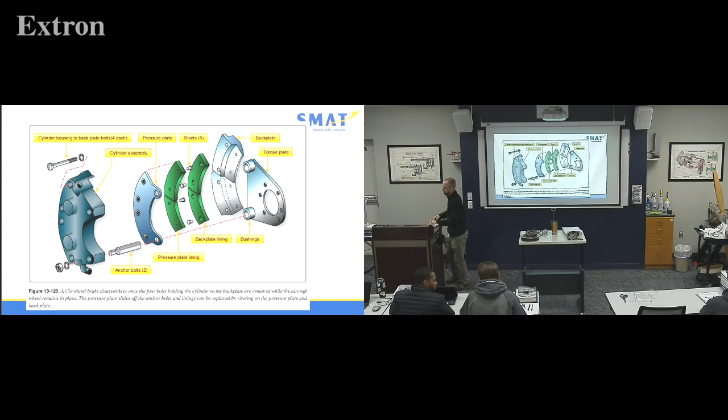All right. Oh, I did want to do a quick overview on this. So this is if you're buying tires from Goodyear. Yeah, go ahead, Corey.

Some of the aircraft, they're on the top. A lot of aircraft, they're on the bottom.

And if you force it hard enough, eventually everything will come out. But we have options to bleed it different ways. Because in a car, you're normally going to just fill up the well, it's a boosted brake system. You're just going to fill up the reservoir at the front. And you're going to push the brakes, somebody's going to open the bleeder, right? And so in our system, you can do that, top down, but normally we'll do a bottom up as well. So it's really nice to do it.

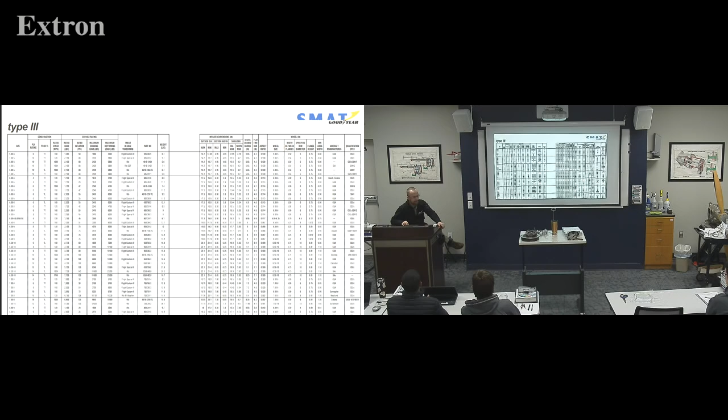From the bottom. Yeah. All right, so if you're looking for a typical, you've got to buy a tire for your aircraft, okay? Let's just do the simple ones, okay? The top category, 5-5. How many of you had a 5-5 tire? Dan, raise your hand. Okay, good. And Gavin, good. Mr. Finney, anyone else? All right, so 5-5 is typical Cessna nose tire, okay?

Typical, unless you get to a 206 or something big, right? So small Cessnas, but notice the ply ratings. What is a ply rating insinuating? The strength of it, okay? So we have 6 ply or 10 ply. But then you get over to the rated load in pounds. Rated load in pounds goes from 1,200 to 2,100. It's a big difference.

So you can't just grab a 5-5 tire and say, let's just send it. Because if the aircraft's 1,400 or 1,500 pounds, you've got to already anticipate that at some point the pilot's going to drive it home. We got a 1,500-pound aircraft hitting a nose tire on landing, and you've only got a 1,200-pound load rating tire on there. They're gonna drive that oleo strut right into the ground, okay? Everybody kind of get where I'm at? So please make sure you're matching the tire to the rated, or what is rated for that aircraft, okay? Goodyear's super good about selling you the right tire.

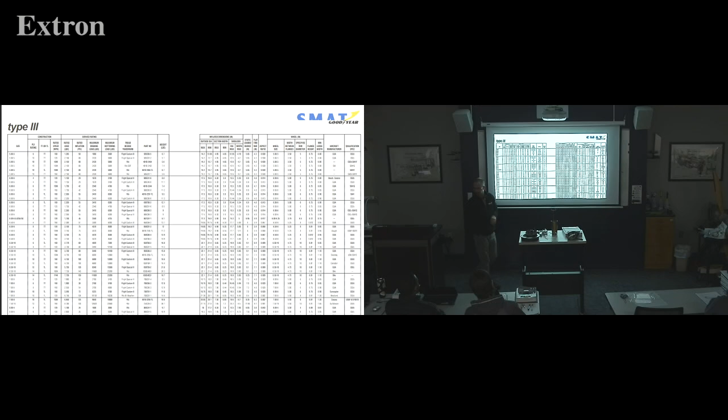Hey, I have this aircraft, notice here, braking pressure 3,400 on some of the 6.6s, okay? Where would I want a 3,400 pound? Probably on something like the Apache, make sure I can stop that load. Versus the Bonanza wouldn't need a 3,400 load, you could get away with probably a 2,500 pound load. See what I'm saying here? We good? So please know what aircraft you're working with. Make sure you get the right loaded tire.

Okay, brake systems. Brake systems. How do brakes, yes sir? For those load rates, is it a harder compound with a higher load, or do you guys use a higher load rating later? Sometimes, yes sir. Yep, because it would be a little heavier or harder.

Yeah, and even think about it. If your wheel is a soft aluminum, use a harder ply rating. The tire may not give if they made a really hard landing. Maybe the wheel would crack instead.

Okay, so how do brakes operate in your car? How do brakes operate in your car? Yeah, on the pedal, pushing on the master cylinder. Push on the pedal and it pushes on a thingy called the master cylinder. Is that what it is? Is that really what it is? The master cylinder? Master cylinder.

It's not a brake boosted or booster brake system? Well, it is, but it's boosted, but no, it's still direct connected to the master. Yeah, so it's sending fluid, but then you get a kick in the pants when the car's running, right? And it helps to add more pressure to the brakes, okay?

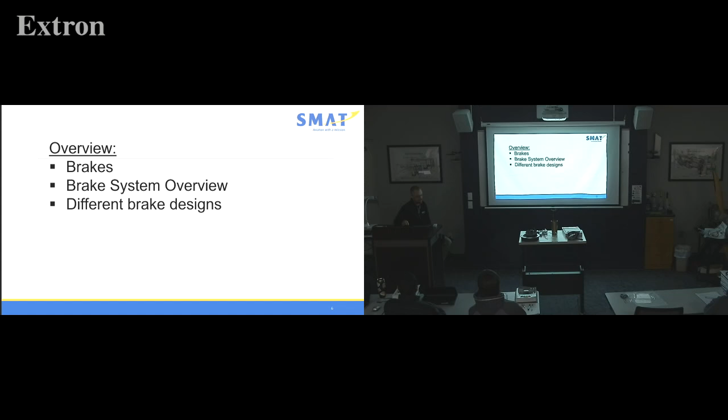Well, in aviation, we have all types of different brake systems, okay? All types. So we're going to hit just a few, the basic ones, and then we'll get more complex. Not today, but just basics today. Brake system overview and different brake design. So we should understand the brake system and understand the operation of the caliper versus the disc.

Okay, problem with brake system, here we go. Somebody turn this all the way down, dude. What in the world?

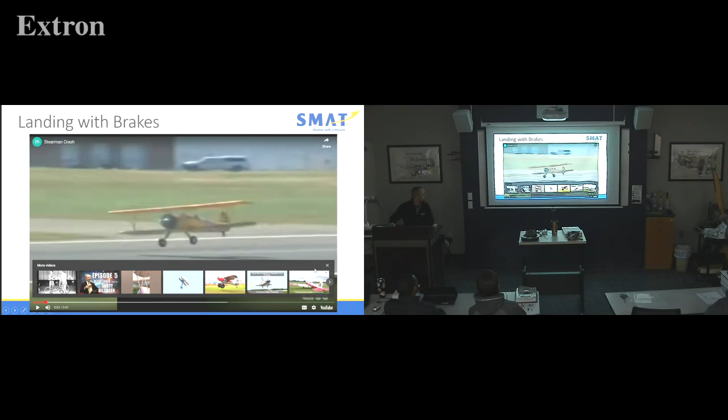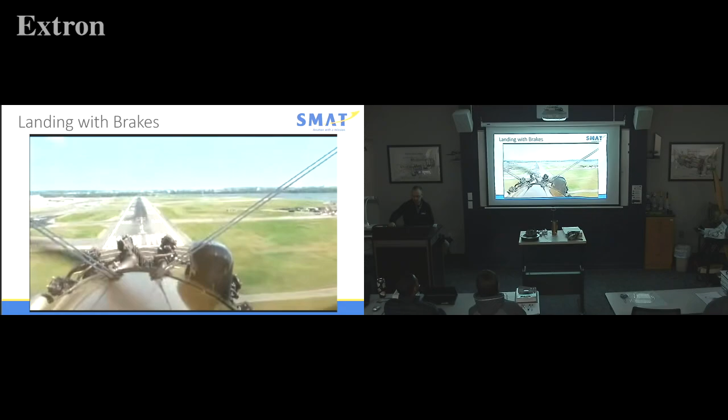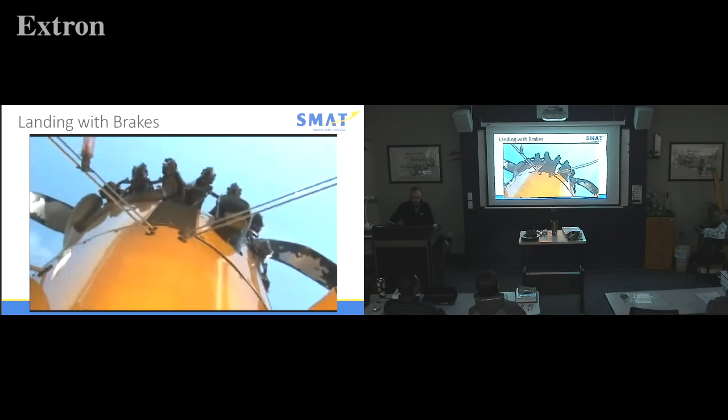And as we came in for a landing, the plane that I was in flipped over. You okay? Yep, unhook your belt. As you would imagine, it happened very quickly. And suddenly we were upside down lying on the runway, and...

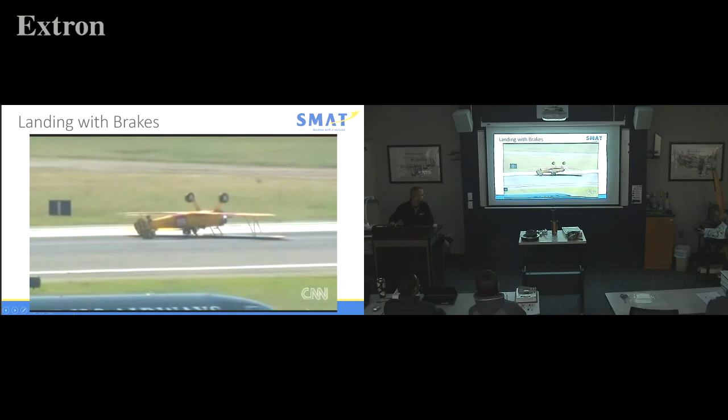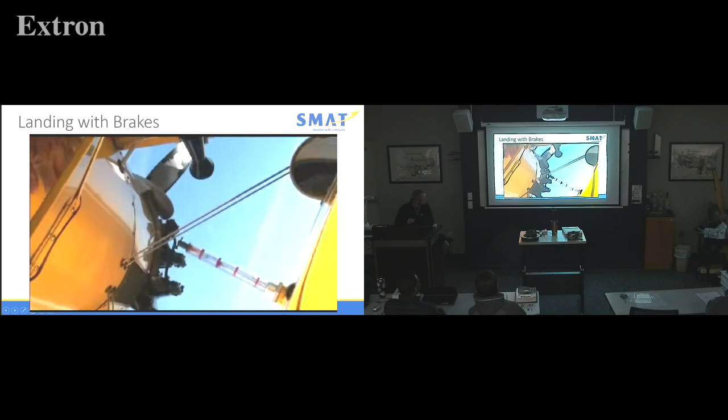And as we came in for a landing, the plane that I was in flipped over. You okay? Yep, unhook your belt. As you would imagine, it happened very quickly. And suddenly we were upside down lying on the runway, and the pilot and I made sure that...

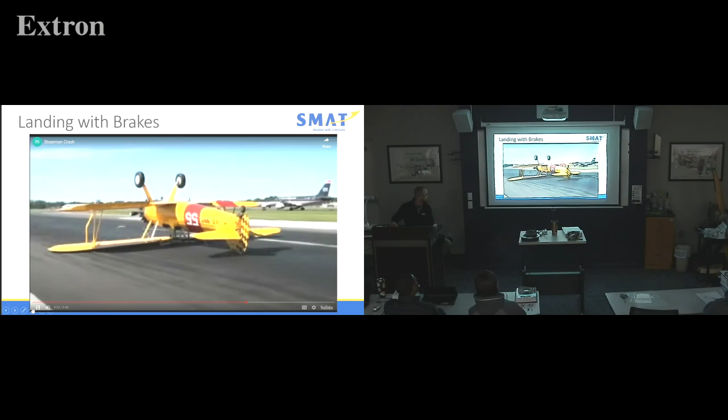Sometimes brakes lock up. Very sad.

Okay, so how do brakes actually operate? You're going to push the brake pedal. Typically it is where on your aircraft? Top of the rudder pedals. Yes, sir. So it would only flip over like that if it was a tail wheel aircraft, right? Because if it was trike style, the brakes would be in the back. Yeah, but depending on how they brake, there's been an occurrence where they can actually tip this way if they really get on the brakes. They can tip sideways, and then the plane sits on a wing and prop into the ground. It happens.

Okay, so you're gonna push on the brake pedal. Old style brakes were heel brakes. Have you ever flown a heel brake aircraft? Taylorcraft, yeah, old Piper Cub. That's when I got my aerobatics rating, was in a Super Cub, and it was all heel brakes. It was super tricky transitioning from toe brakes to heel brakes, because it's like, oh no, I want to push the rudder. No, that's the brakes. It got a little tricky sometimes.

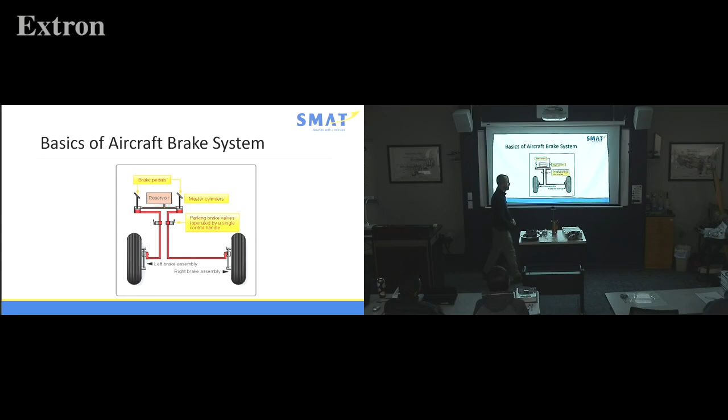And they make Goodyear brakes. That caliper's on the inside, ain't it? Okay, I guess you're, no wait, it's not on the axle. Axle would be right here, bam. And let's not talk about Goodyear brakes here.

So, dual master cylinder system. Pilot's got some brakes. Oh, and guess who else? Co-pilot gets brakes too. Instructors really like this style. First aircraft I flew, I was 15 years old, and only the pilot side had brakes, and he's like, man, you know what you're doing? He was super nervous, but you know what, I'm here today, so I guess the brakes worked.

So, as the pilot pushes on brakes, notice the difference in the brake master cylinders. What do you notice? Any difference there? One has a reservoir, or one's a little chubby up here. Okay, so we've got one like this, bam, and you got one like this, bam. Okay, make sense?

That's all it gets, that's all the fluid, that's all the reservoir. Why do we need such a small reservoir? It's not supposed to run a lot. No, you don't really need brakes until you land, right?

We don't use tires very often, right? We don't use brakes. So the pilot pushes, and it comes in the inlet, and out the outlet down here. I can't think of an aircraft that would run this system. Piper runs it opposite, where they have a reservoir up here that runs to the co-pilot, then over to the pilot. The pilot has direct down to the brakes. That's a better system, because now as the pilot pushes, it's got to push it through the co-pilot's side and then down to the brakes. See that problem there? So if I have any air in the system, it's going to show up.

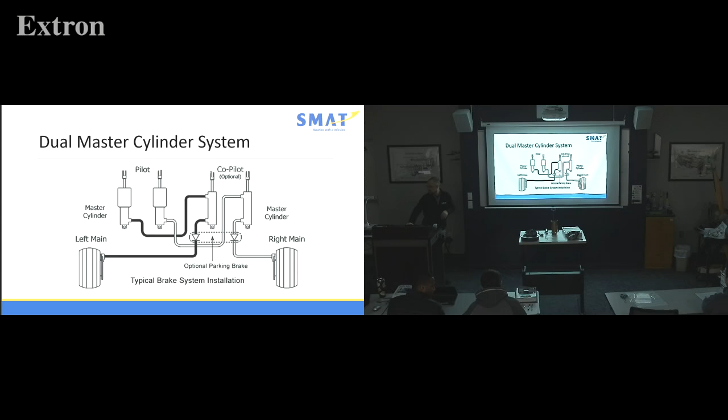So in this system, we have a reservoir. The reservoir is filling the master cylinder. As the co-pilot pushes, where does it go? Over to the pilot side, and then out the pilot side down to a parking brake, or actually directly to the caliper on a Piper system. So that way the pilot has direct control. That's actually a better system, the way the pilot has direct braking.

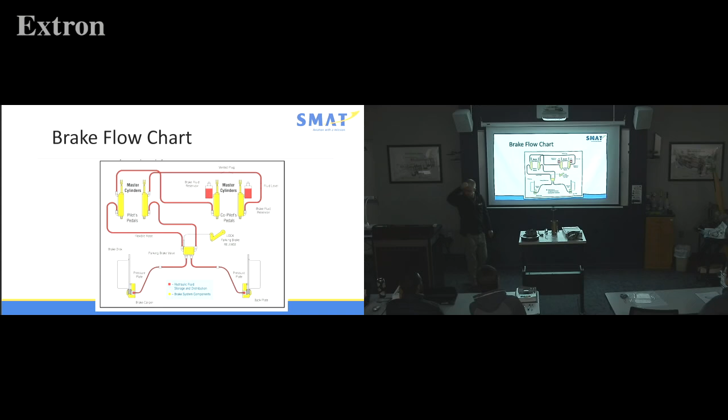One of the functions of the brake system is to absorb heat energy developed during braking. The majority of this heat is absorbed by the brake disc. Get this - some tires actually have weep holes that, as they get too hot, will have a fusible plug that will actually release that heat.

Why is that? Not seize - well, maybe it'll seize, that would be on the brake side. But it's rubber, and as they heat up that tire, there's a great chance of flammability. Oh no, the tire's super hot. Now they'll release a fusible plug so that the tire does not catch on fire, and that plug will go out and release it so that the heat energy doesn't cause the tire to catch on fire.

The large mass of the disc - so the majority of the heat is absorbed by the brake disc as it's spinning. The larger the mass of the disc, the more heat energy it's able to absorb. A well-designed brake system will provide adequate disc mass without excessive weight. So we have very thin discs, even on larger aircraft, for example the Beechjet. The discs themselves are very thin, but there are multiple ones so that it can dissipate that heat. Yes sir?

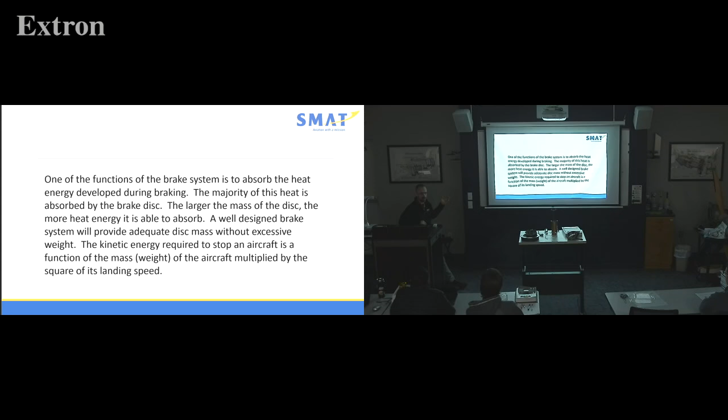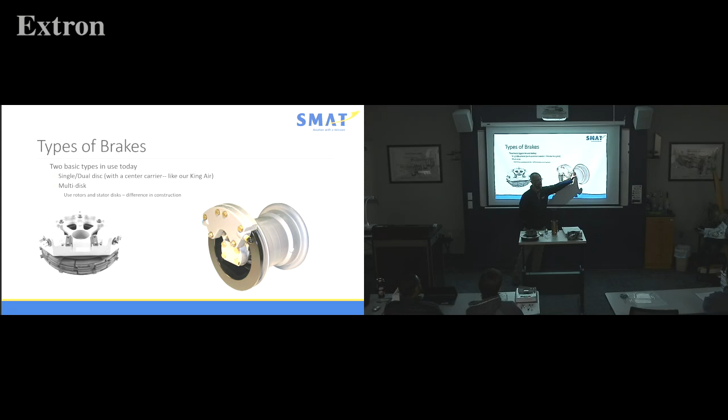Over here we have a single disc attached to the wheel, and the floating caliper. Is this single or dual? Dual piston. We have dual pistons here, and it's squeezing. It has a lining on this side and a lining on that side, squeezing that disc.

One of our favorites here is an expander tube. Anybody ever worked on one of these? On a four-wheeler. So these are mostly pure asbestos, okay? Discs here are linings, and inside is a tube. As they pushed on the brake, it would push out on that rubber tube like a balloon.

It would push on the wheel inside to stop it or slow it down. Expander tube - kind of like drum brakes, in a sense? No, this is a drum brake, a little cute drum brake. As you push on a drum brake, it pushes on a little cylinder, and then these come out and slow it down. Versus expander tube, the whole tube is filling, the whole giant tube is filling, literally like a rubber balloon.

DC3s use this. This is off an old mail plane. When I pass it around, it says Jackson, Michigan, which is where the mail route was until they almost bankrupted. Then he flew it out of the hangar in Jackson, Michigan, and immediately had enough business for the next 30 years.

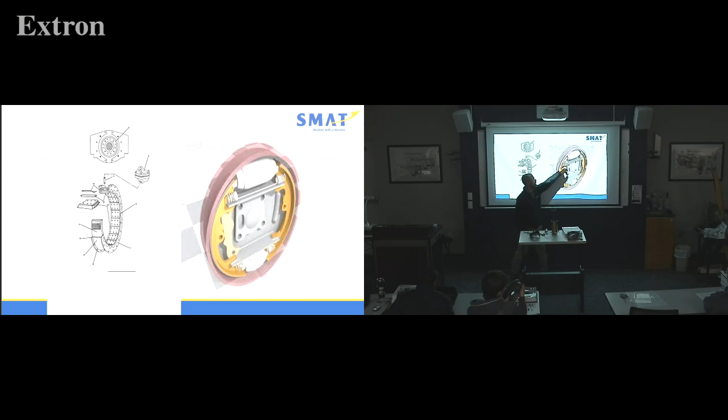Drum brake off a Chevrolet truck or old Ford truck, where it pushes on both sides and it slows it down. This is one off an actual aircraft here. So as you push on it, what does it do?

It gets hung up? No. Go ahead - drum brakes do exist on airplanes? They do, yep. This is an actual one, and notice there's no adjustment like there is on a Chevrolet, okay? You just keep pushing harder if it doesn't stop, right?

Now, you have direct linkage. Taylorcraft doesn't use hydraulic fluid, but they use drum brakes with a cable. So they have a cable connected here, and that cable is adjusted over time. You gotta keep tensioning that cable up as the brake disc wears, okay?

So this is a drum brake, and that would be an expander tube style. Any questions on these two types? DC3 still uses the expander tube type. I have one, and it's about 40 pounds - pretty wild looking. That's inside the wheel itself.

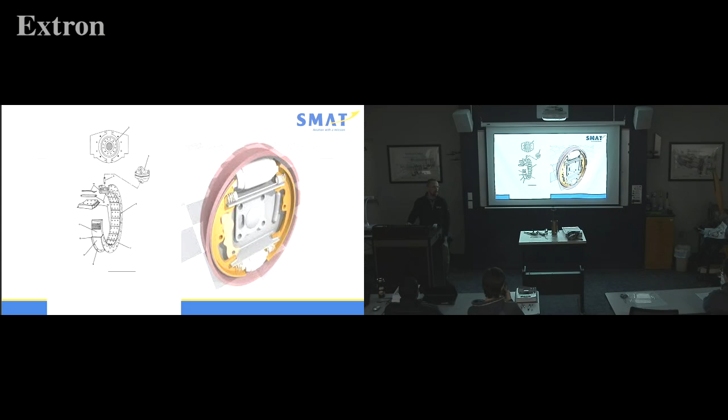All right, let's move on to Brian's favorite. Everybody ready? Drum roll, please.

Oh, yay! Okay, so we have the historic one here called the Goodyear brake system, which there are still some out today. They have not been made since sometime in the 70s - sometime in the 70s they quit making Goodyear.

So the way this works is you have a floating disc. The disc is made to float. This looks like a gear - it's really not, it's actually the point of floating for this Goodyear brake disc. And what is stationary is the actual caliper, and the caliper is then directly bolted to the axle.

So as the wheel spins, then you push on the pedal, and it pushes out this little tiny cute baby asbestos brake lining. I'll pass it around, it's still in there, you'll look at it. And that's what stops it, okay?

Why did they stop these? Anybody have an idea of why they stopped making these?

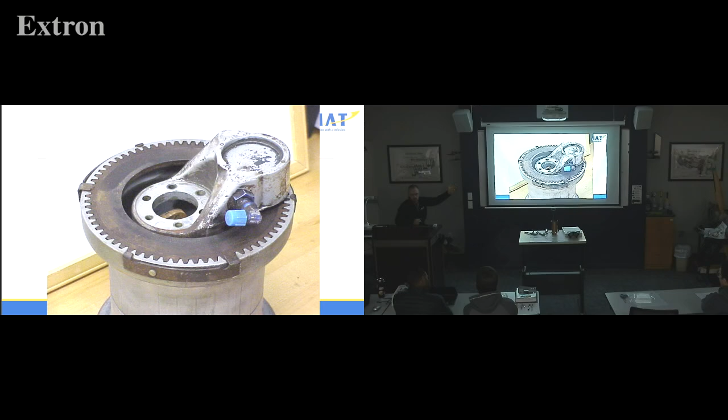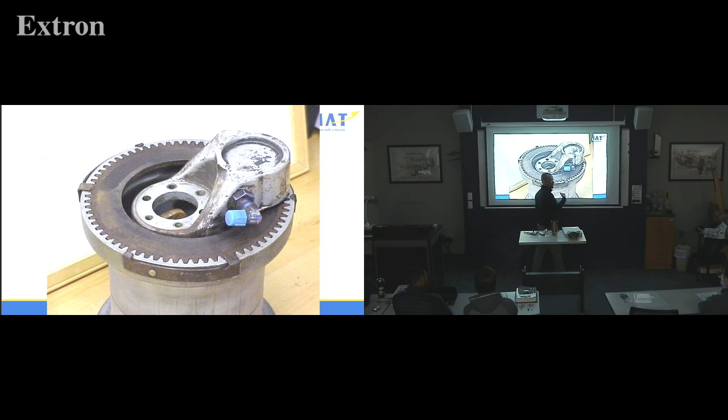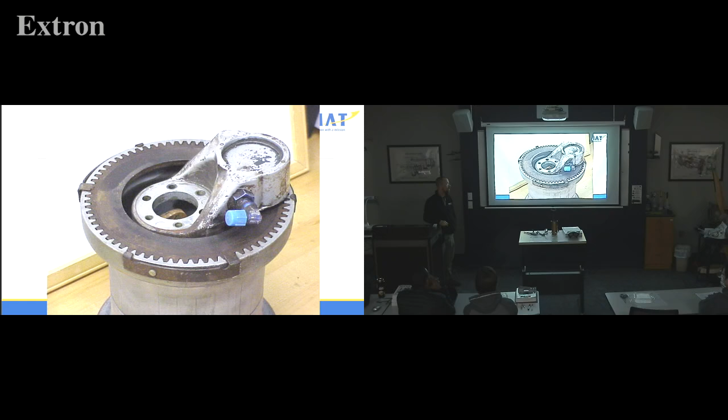So moving on to the next generation here, now we have dowels that actually float. Cute little dowels here, and they float, and the disc is stationary, attached to the wheel. As it moves along, you push on the pedal, it moves this plate via the piston out and squeezes the brake. When you let off, it goes right back away. So now we have 2 little dowels, that's all it has to float instead of a giant disc floating.

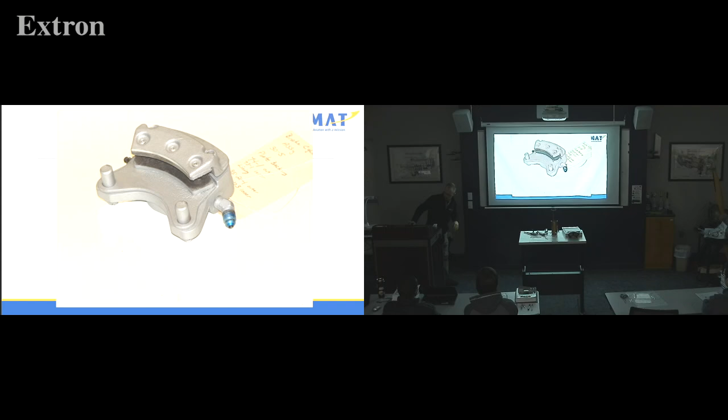And then here's our brake disc itself. Can you resurface a brake disc? Nah, we just throw them away once they get to a certain thickness. The quick reference guide will give you the thickness for the brake assembly, wheel assembly, and the brake disc. All you do is take that measurement. If it measures good, you're good to go. If not, then you throw it out and buy another one.

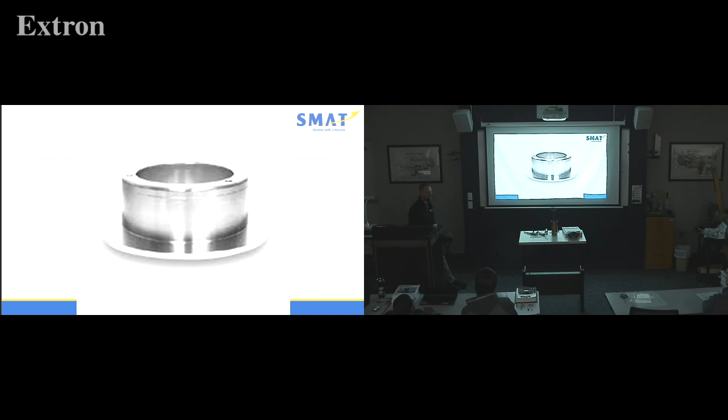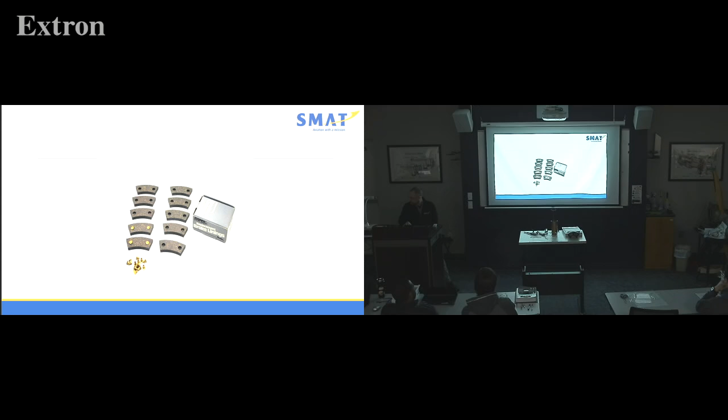Anyway, they make brake linings for all aircraft, and they're put in by little brass rivets. They're super easy to change, just a matter of a few minutes, and they're cheap. That's all that stops on a single brake disc. Any questions on how a single brake disc system works so far?

Okay, this might be the actual picture that you would look at when you're doing your maintenance. So here, number 15, we have the torque plate. Torque plate is attached to what? What do you think, Mr. Peterson?

What's this attached to? The axle, right? Versus Goodyear, where the whole caliper's attached to the axle. Here, just the torque plate's attached, and then you have two dowel pins, number 3. All these do is float, so it's good practice to put a little anti-seize on them to keep them floating, just like a car.

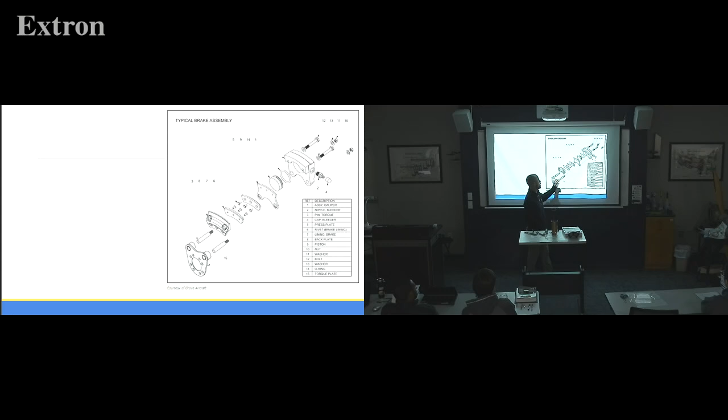Then we have our caliper, with the piston in it, a back plate, linings at number 7, the pressure plate, and number 8, a back plate. The two linings go on either side and squeeze the disc.

It is very common for the piston to leak out of the caliper. So what do you do? You take the caliper off, make sure the bleeder is closed, put a little air in it, blow it out, clean with mineral spirits, change the O-ring, and put it back together. Very cheap. In the automotive world, we don't overhaul calipers anymore—we R&R, remove and replace. In aviation, you take the O-ring out, change it, and you're back on the road for $3, plus labor.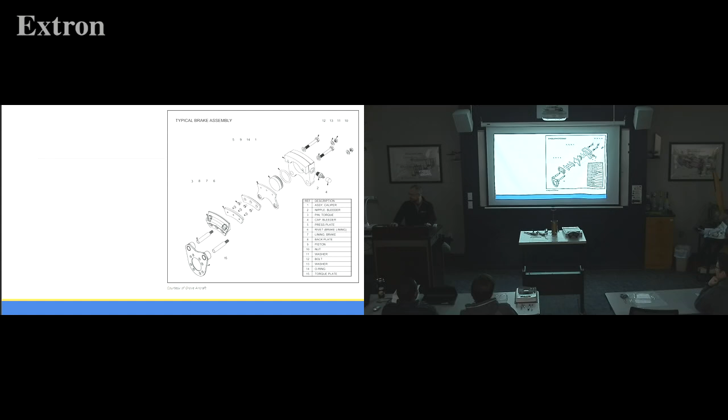All right, so this is a typical master cylinder. What do you notice here? Cessna style. You got two master cylinders, one for the right brake, one for the left brake, and then you have the connection linkage there.

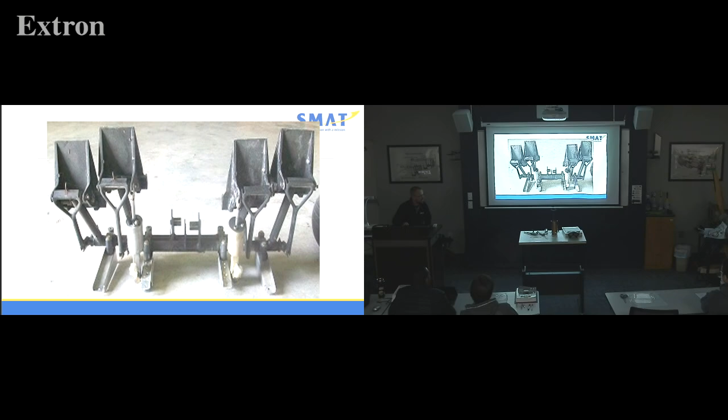The master cylinder sits there hanging out. As you push the brake, the pedal pushes down on the piston rod, and the piston's here at the bottom. It now takes fluid from the reservoir, basically seals off the fluid, and pushes down, becoming the cylinder to push on the brake fluid.

As it comes up, there's a tiny little space between the piston and the spring—according to the Cessna manual, that's 40 thousandths of an inch. When you do your master cylinder, I will check every single one of you, because if you don't have that 40 thousandths, it pulls back and won't refill. The brake pedal won't come all the way back up; it'll sit just slightly down because it doesn't have the chance to spring back and refill. So every time you push the brakes, it wears a little, but it automatically refills that cylinder as long as there's fluid in the reservoir.

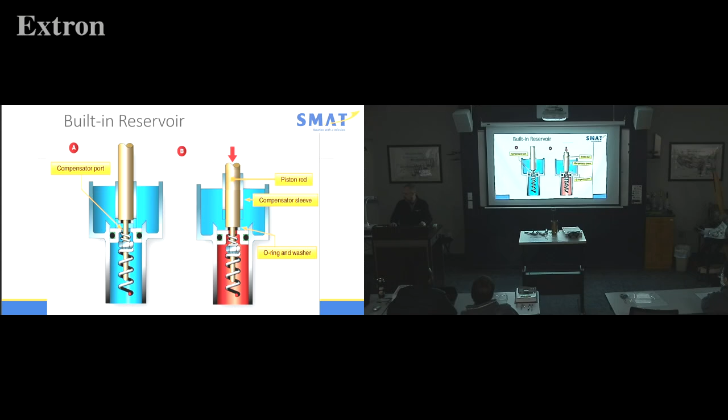All right, Zach, just for your enjoyment, we're going to talk about bleeding brakes. Okay, so, all right, no problem, I'm glad you are. All right, so I'm going to go to it.

Here's a typical connection on your brake caliper. This is where you'll see your brake line come over to the caliper. Here's our wheel, brake disc, and it's squeezing, okay?

The lab I'll hand out tomorrow will include removing a master cylinder, inspecting it—the only way we do the inspection is we literally take it off the pedal and take the top off. Do not take the bottom housing off; save your time, save your sanity. If you want to go toward insanity, take the whole thing out. But if anyone ever asks you to do a master cylinder inspection, what they're really saying is pull the cotter pin, pull the pin off the back of the pedal.

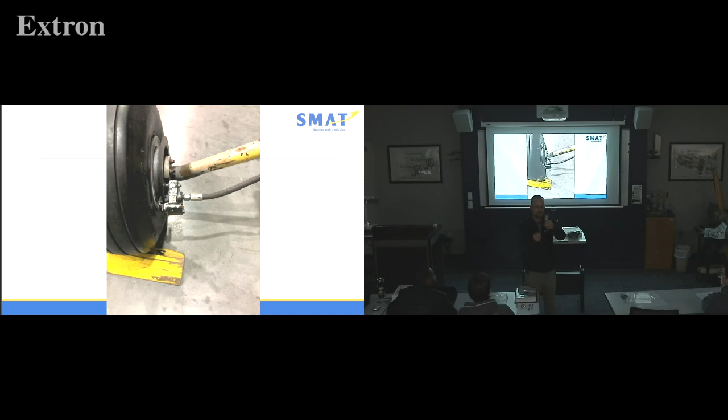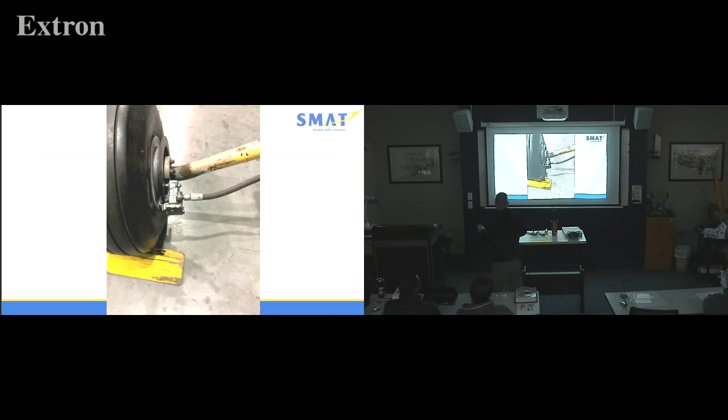As you push on it, we get a little bit of movement. That little O-ring is what pushes down the cylinder. And now if you notice, right here at the top there's a little tiny V—everybody see that? I'm helping you. Here we go.

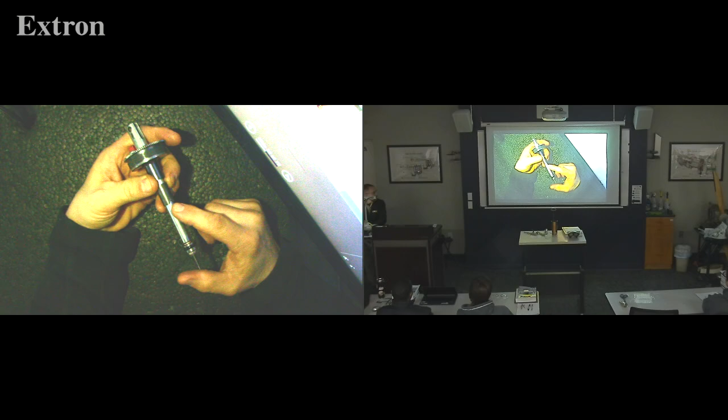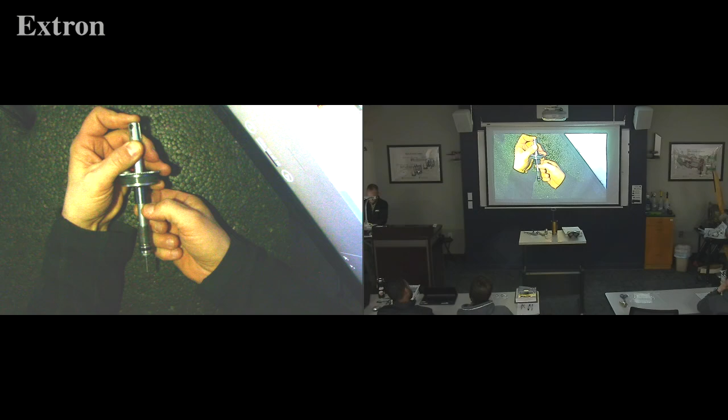See the V right there? Boom. Okay, so as you push the pedal, it goes down. This pushes down because it has this piston, or the actual cylinder piston rod, behind it, pushing on the piston. Now it goes down into the hole and pushes on the fluid because of this O-ring.

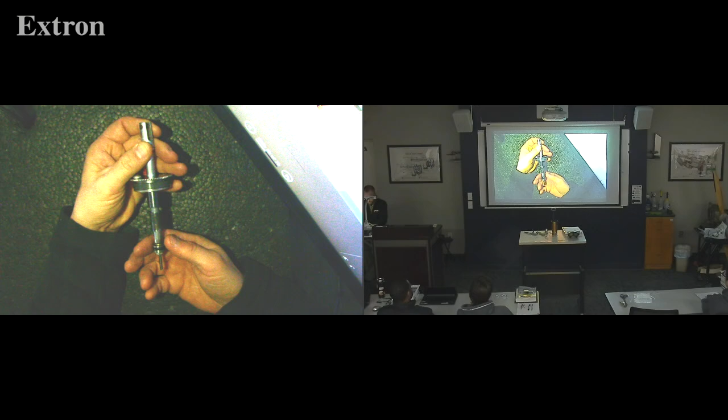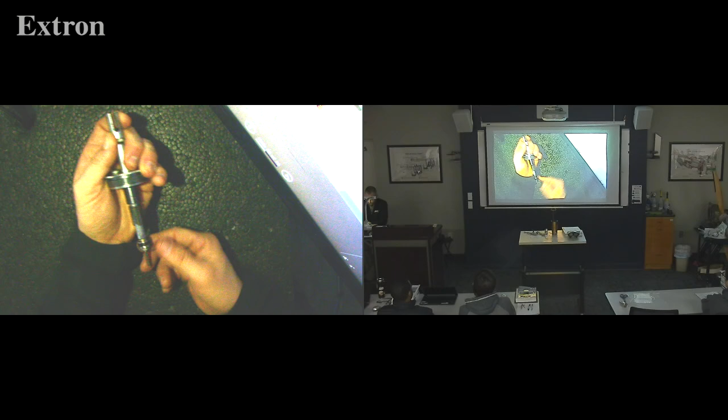Okay, when it comes back up, here's what happens. You have 40 thousandths right here, and it pulls down. Do you see that movement? So the spring is always pushing up, and then I pull down against that spring. I need to have a minimum of 40 thousandths between that right there. As you tighten that nut up, I should have 40 thousandths.

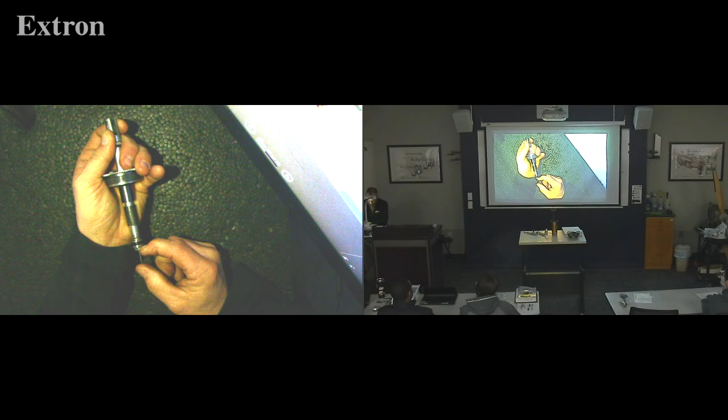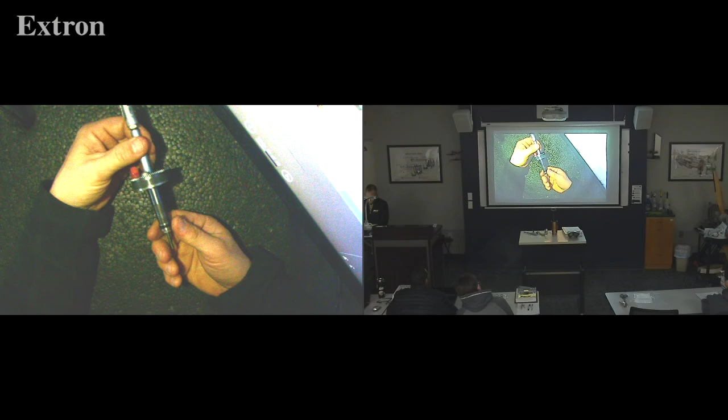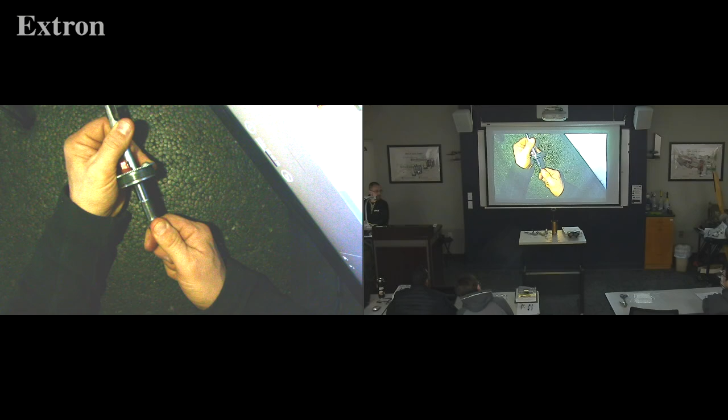So when I pull it back, when the brake pedal comes back up, when Trevor lets his foot off the brake pedal, this piston pulls back and fluid goes down the little V. Everybody got me? It goes through the hole inside the piston.

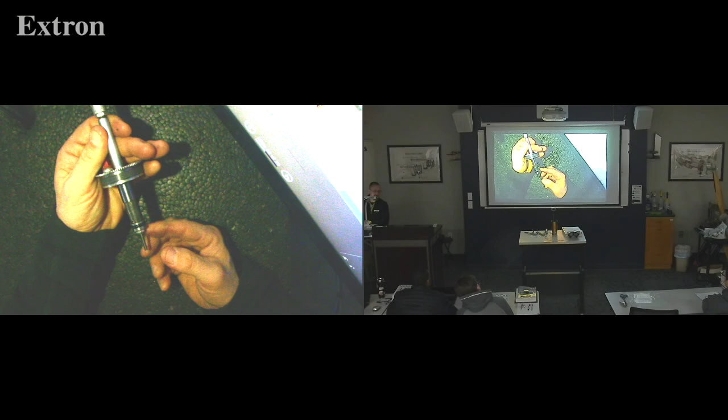Goes through the hole inside the piston and refills the cylinder every time. If you tighten it, there's a little O-ring here and a little O-ring inside the piston, and if you tighten it, it cannot compensate. The pedal will just sit there straight down, it won't ever bounce back, because that little spring needs 40 thousandths. That's it.

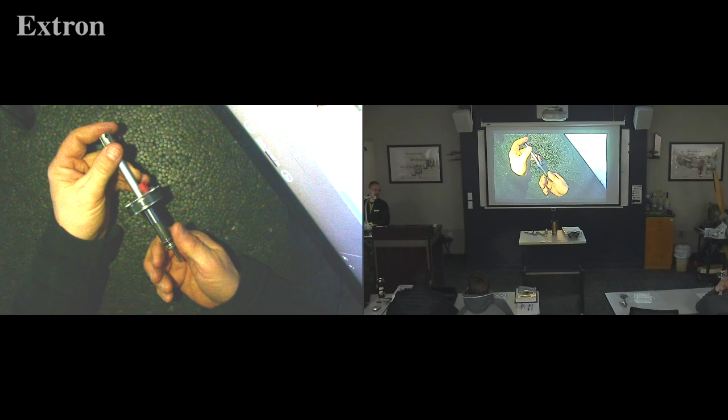Got to have that space. It's supposed to be there. And guys are like, man, that seems loose. Yes. And so it refills and you can have brakes every time.

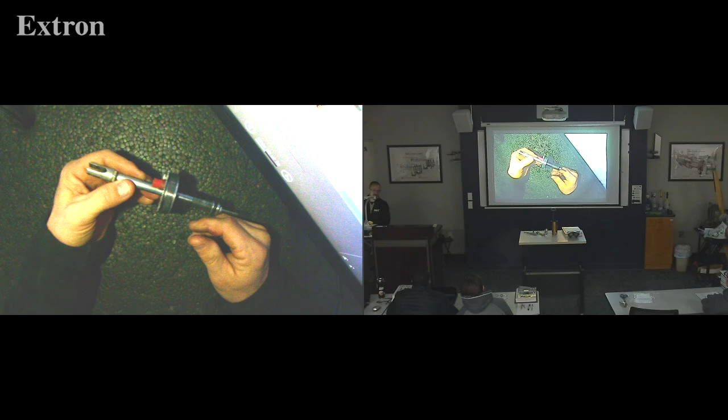Today we're going to take apart a Cleveland brake. This is off a Cessna 150, but a lot of airplanes are very similar.

Here we're measuring the brake disc and inspecting the disc. We took the tire off this wheel half. What type of wheel is this? Corbin? Yep. Cleveland. Was that a guess?

Hey, Greg, before we do too much, I want to see what this brake's been through. My brake disc looks pretty good, a little bit of rust, but that's normal, it's a steel part. So now we've got the brake disc, or the brake caliper here.

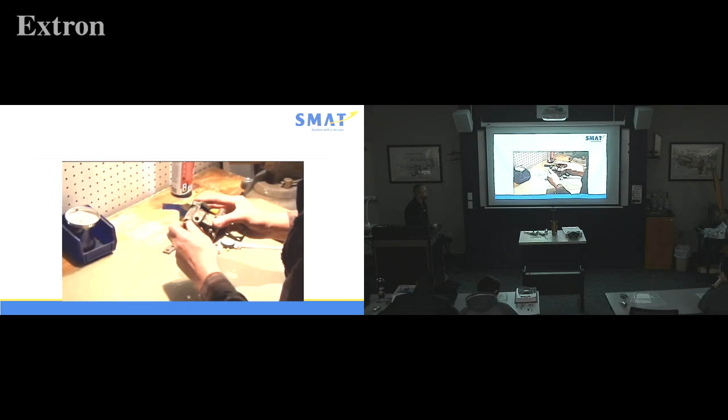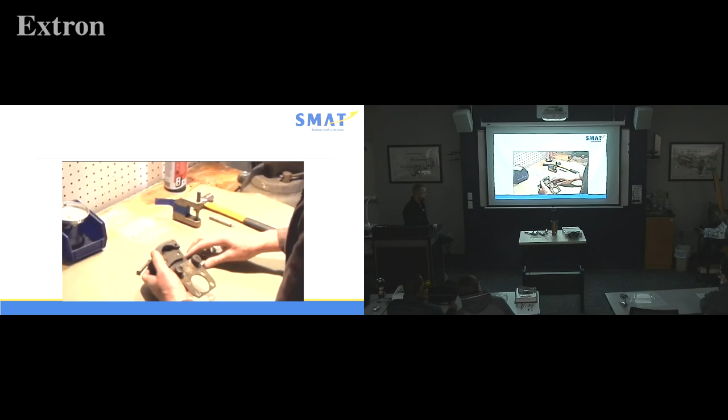I'm going to take the bolts off. I had the other pad, the two pads are bolted on, or the one pad's bolted on the outer pad. Take that off, and I'm going to do a little inspection here. Going to inspect these, and these linings actually don't look too bad, they've got some wear on them.

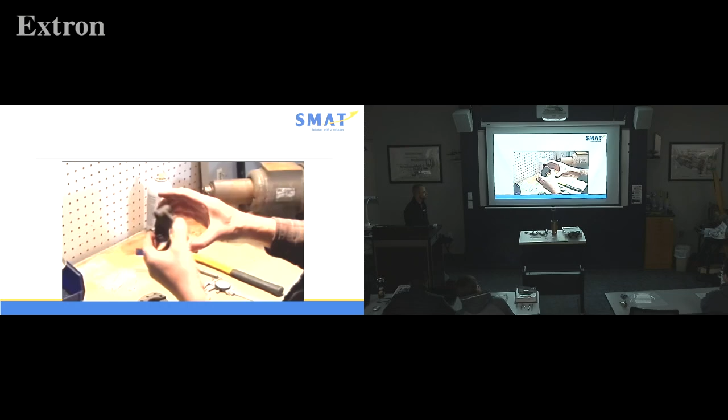I'm looking at the part that holds the axle mount for this. Now this has got a couple of grooves in it. I'm a little bit concerned about that, so I'll consult the overhaul manual over that. But not too bad. Here I'm pulling the inside lining out.

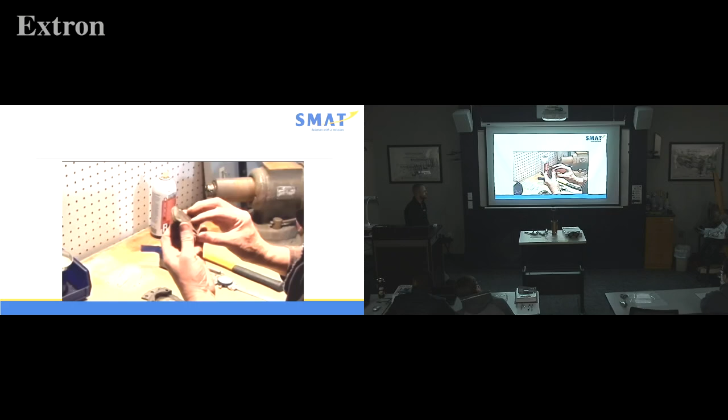And you can see underneath that's the piston. I'm going to measure this with the calipers, and my numbers are in the book, so I can check that. Here I'm looking at the overall condition of the caliper before I pull it apart.

Which book would you find the thickness for the lining?

I want you to do as a good mechanic is grab the linings and see if they move. They are brass rivets. Over time, the rivets could get slightly loose. If there's any movement in the lining, just put another rivet in, or look and see if it's actually cracked around the rivet hole. That's a common thing, is that it will crack around one of those rivet holes.

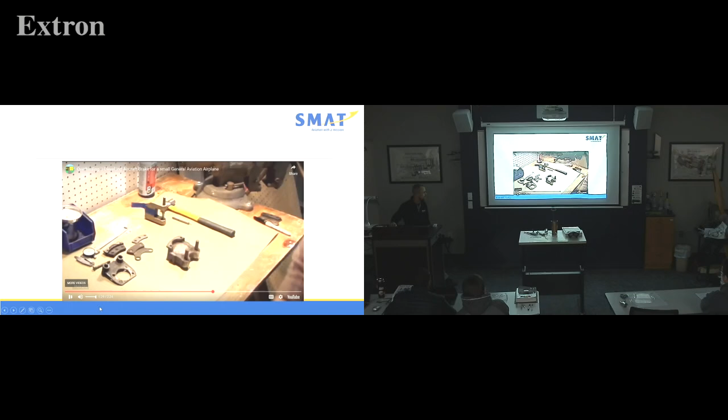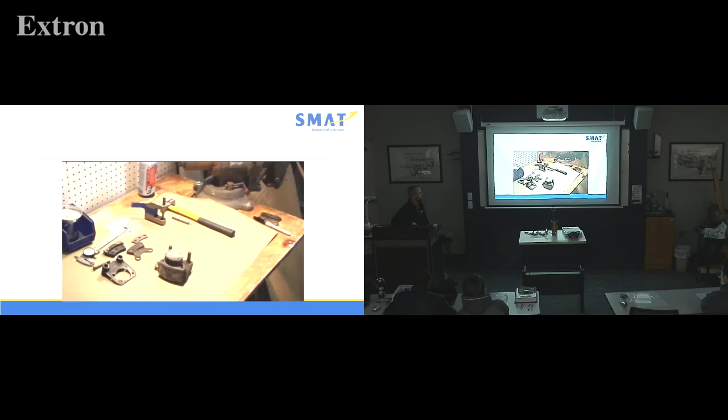This caliper spent some time in the tank. Here I'm going to take a little bit of compressed air, turn my compressor down, and just give this a little blast. Be careful because you can get hurt doing this. I turn my air compressor down and blow the piston loose, and now we get a chance to inspect the piston, the cavity, and the caliper.

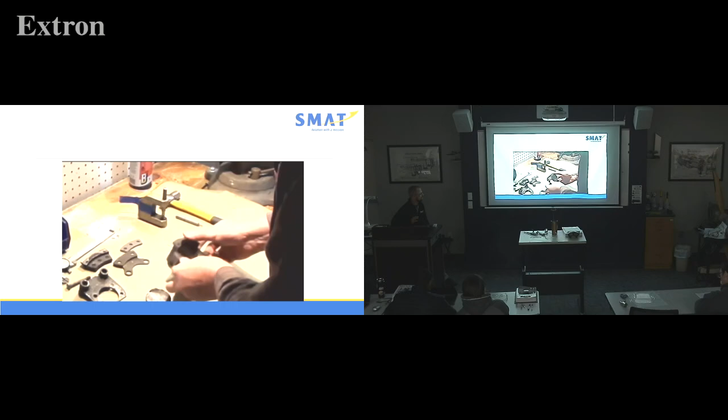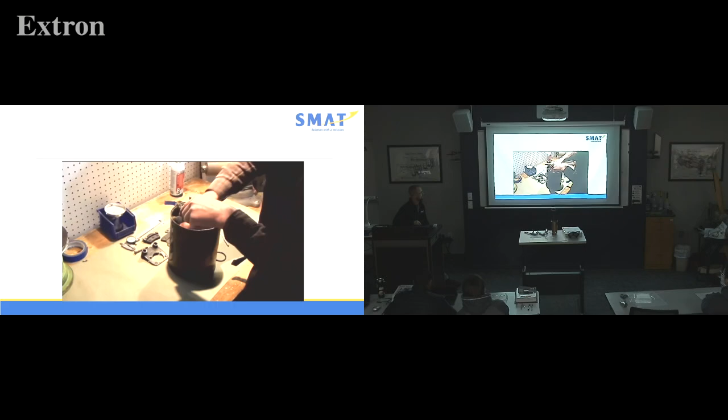And I want to see if there's anything broken here, any big scratches, galls. I pop the O-ring off with an O-ring tool. And the next thing is this thing's going to make another trip to the solvent tank. I'm putting everything in mineral spirits, also known as Stoddard solvent. Taking my brush, I'm going to do a little bit of brushing and cleaning, and we're going to get ready to start overhauling this brake assembly.

All right, good deal. So when you're doing yours, you get a right brake. You're going to pull the brake assembly off, inspect the full brake assembly, measure the disc, measure the linings. Then you're going to put it all back together, and then you're going to inspect your master cylinder. Do the inspection of the master cylinder, put it all together as well, okay? And then at the end, you've got to bleed the brakes on the aircraft, okay?